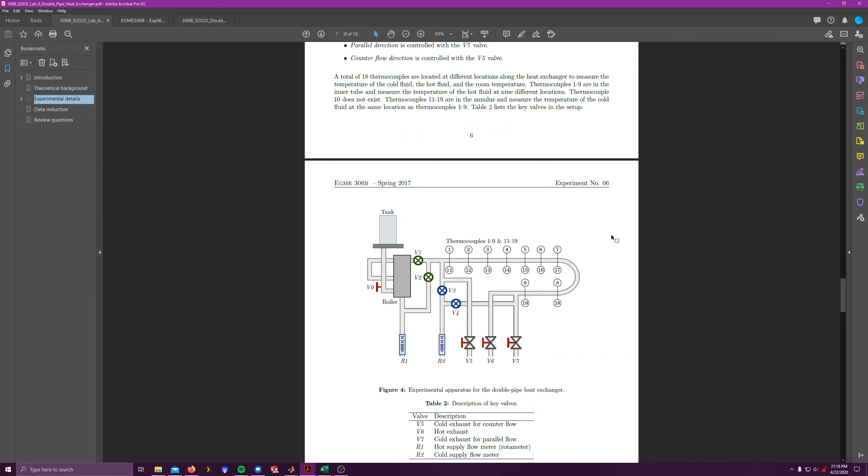And then here we have our setup, our test setup. So let me zoom in. So all of these circles here, they're the thermocouples that we have.

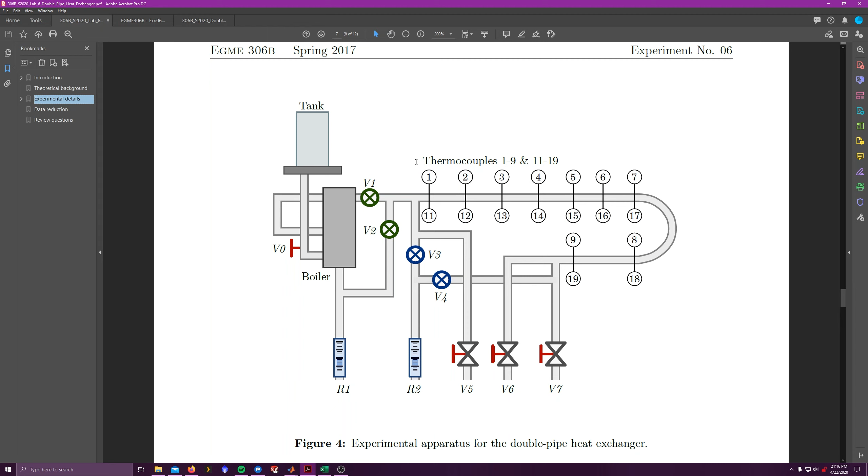Thermocouples 1 through 9 are going to be in the inner tube and they're going to measure the hot fluid. Let me make sure I remember that correctly. Yep. And then thermocouples 11 through 19 are going to measure the cold fluid, and they're going to be in the annulus. And as you can tell, all of these thermocouples are at the same axial location, so we can measure both of them at the same spot.

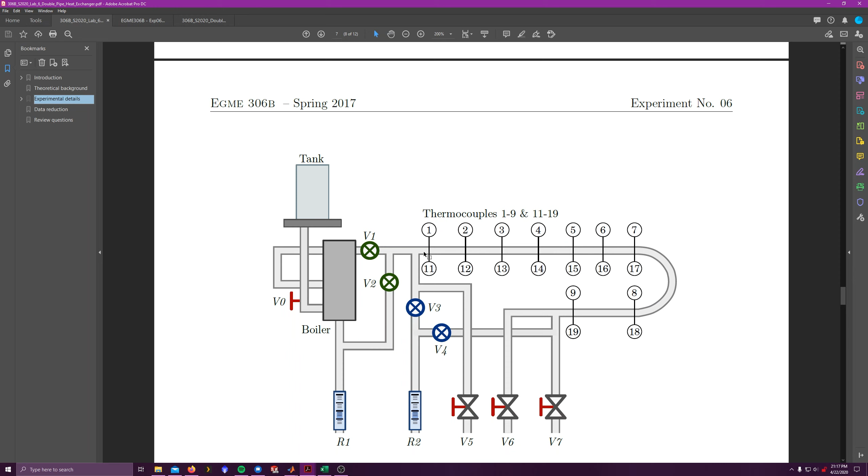Okay, and then in the lab, what we would have done, of course we can't do it, we would have two kinds of setups where we have uninsulated and then insulated for the heat exchanger. So basically, we would just have some gray foam, basically.

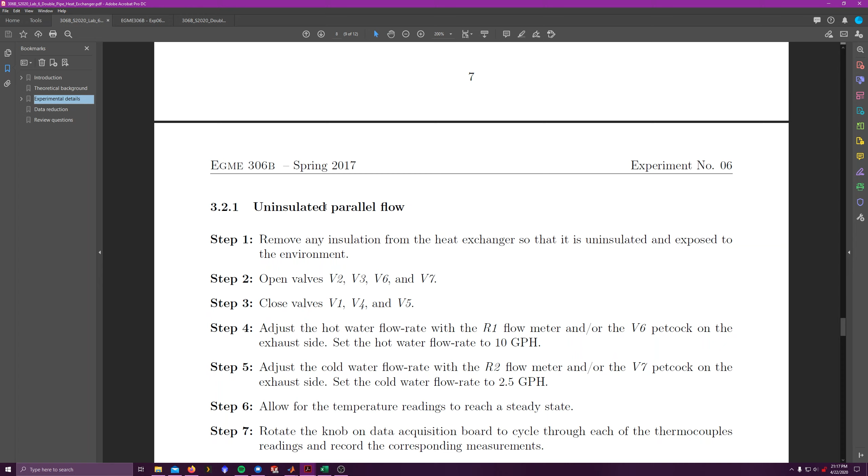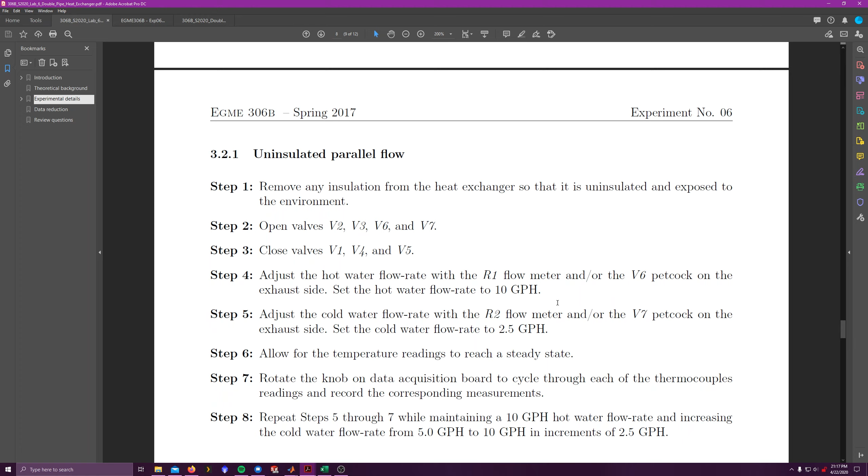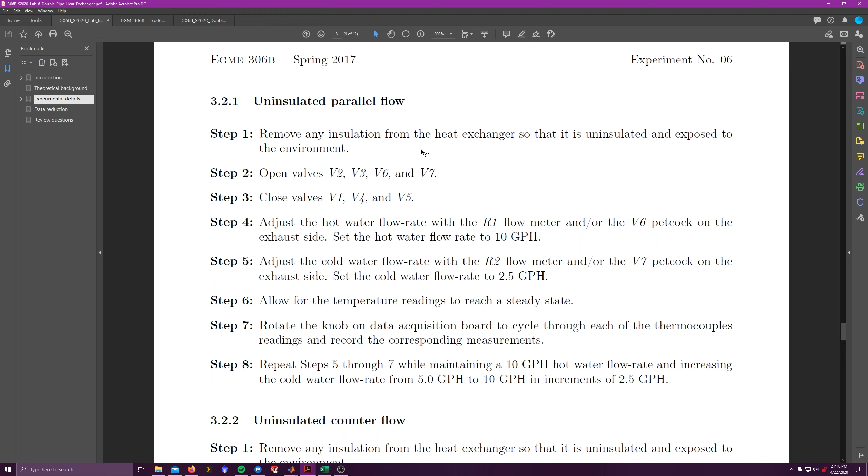Gray insulation. Okay, so what we do is we would start out with the uninsulated parallel flow. For the hot water, we would keep that at 10 gallons per hour, and then for the cold water we would start that at 2.5 gallons per hour, and then we would increase that up to 10 gallons per hour in increments of 2.5 gallons per hour.

Actually, 19, I think that's for the static port. Thermocouples 11 through 19, that's for the cold water. Okay, alright.

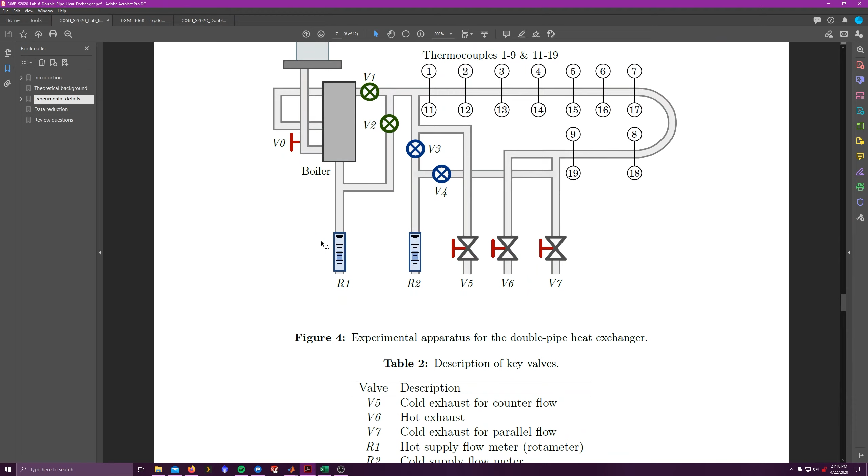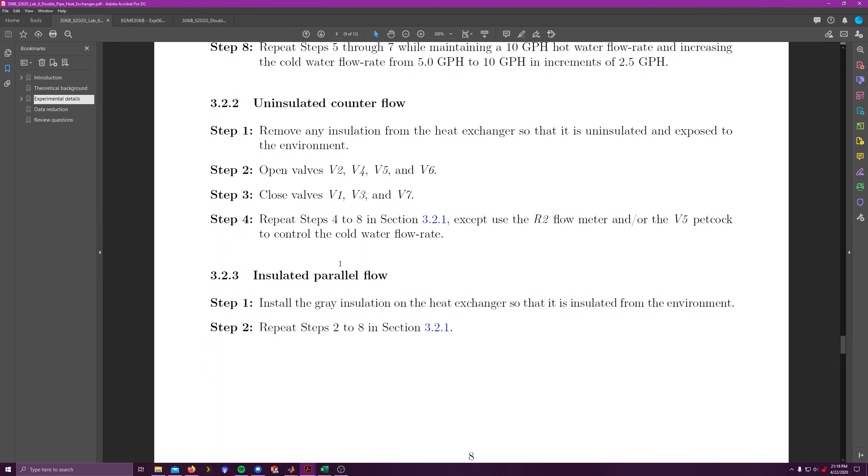So we're doing that, and then we have the insulated versions down here. Okay, so let's go back to the document here. So we have the uninsulated parallel flow, and then we have the uninsulated counterflow, and then we have insulated parallel flow, and then insulated counterflow. And we're basically doing the same thing each time where we're only going to adjust the cold water flow rate.

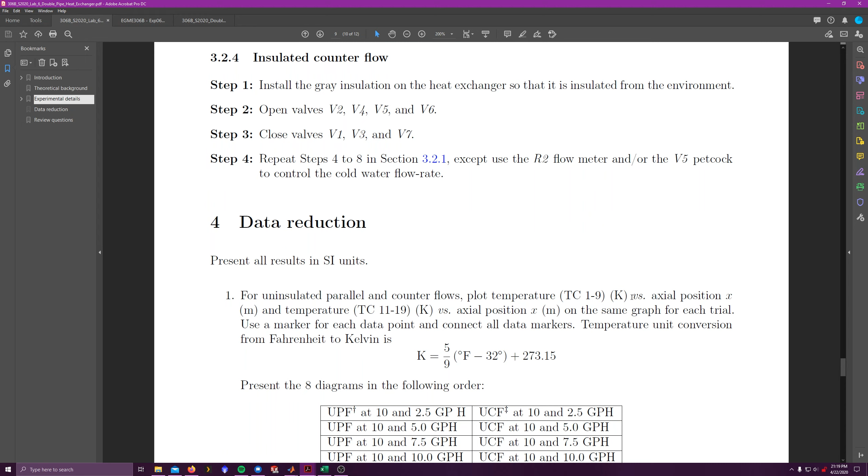Alright, so for the data reduction, what you have to do is measure or graph the temperature versus the axial position. And we're going to do that for all of the different flow rates, and we're going to do that for our insulated configuration and our uninsulated configuration.

And then for each of those graphs, you're going to have two curves on there. So you can have one curve for the cold fluid, and then one curve for the hot fluid.

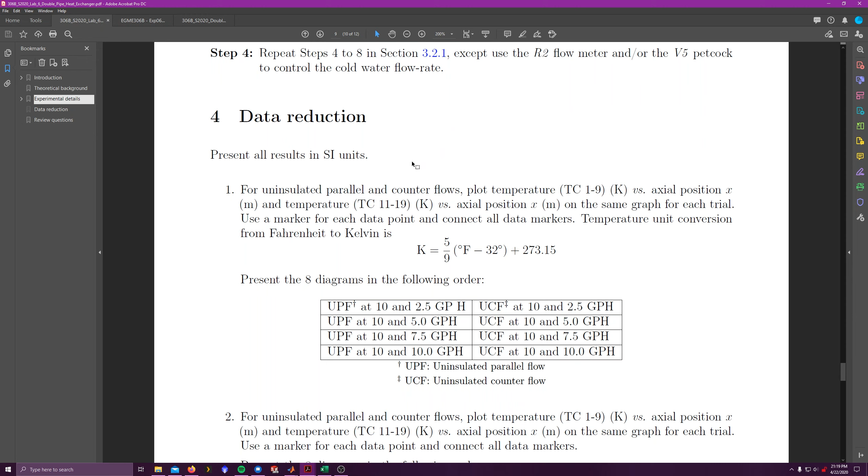Okay, so number 1 and number 2, they basically say the same thing. This one should just say insulated right here.

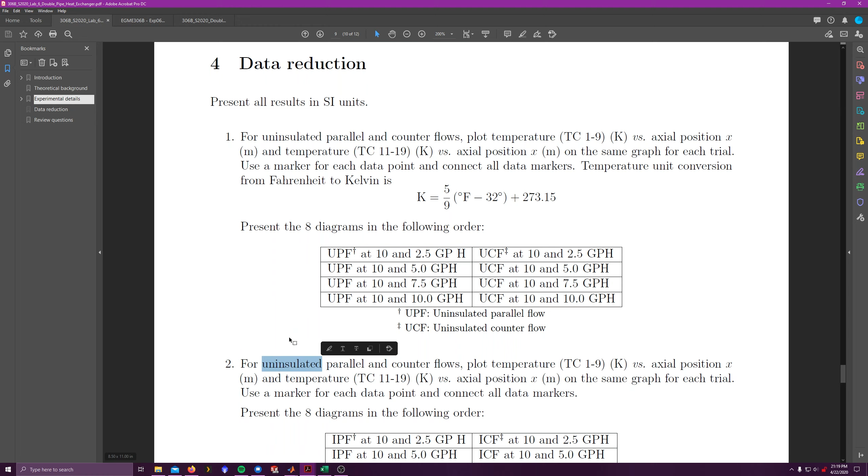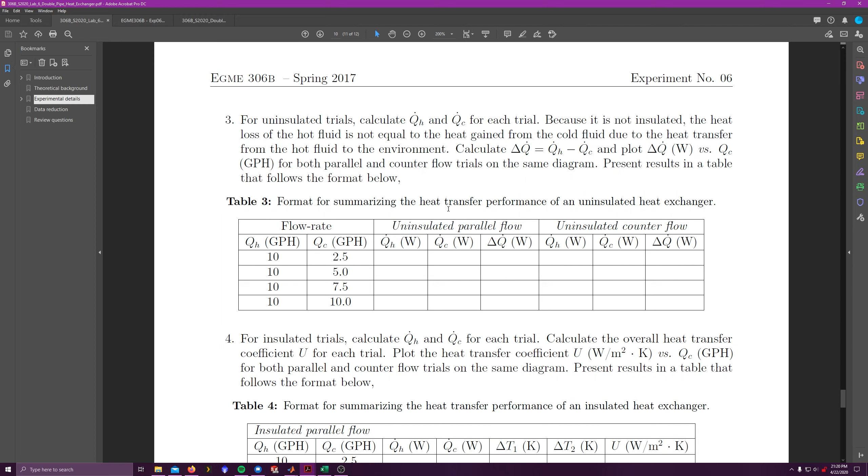Okay, so number 3, for the uninsulated trials, you want to calculate the heat loss, basically, and then we're going to plot that against the flow rate. Sorry, I'm looking at my notes here.

Okay, and then for the last one, we're going to calculate the heat transfer coefficient U, and then we're going to plot that against the flow rate as well. And that's the flow rate for the cold fluid.

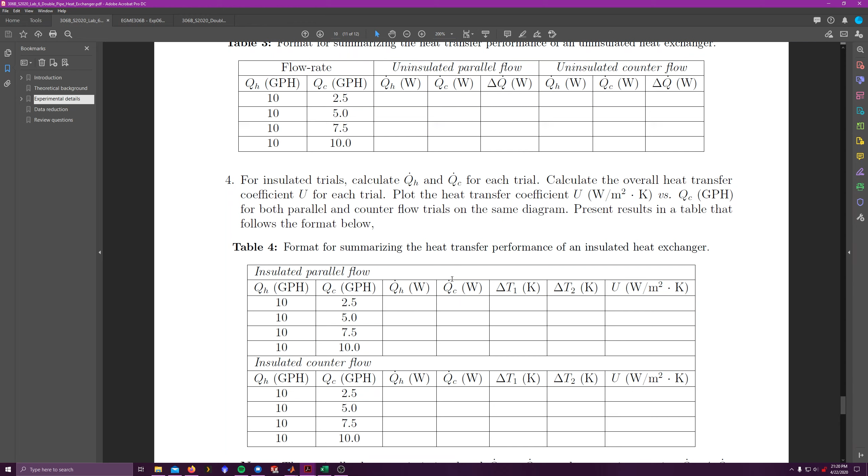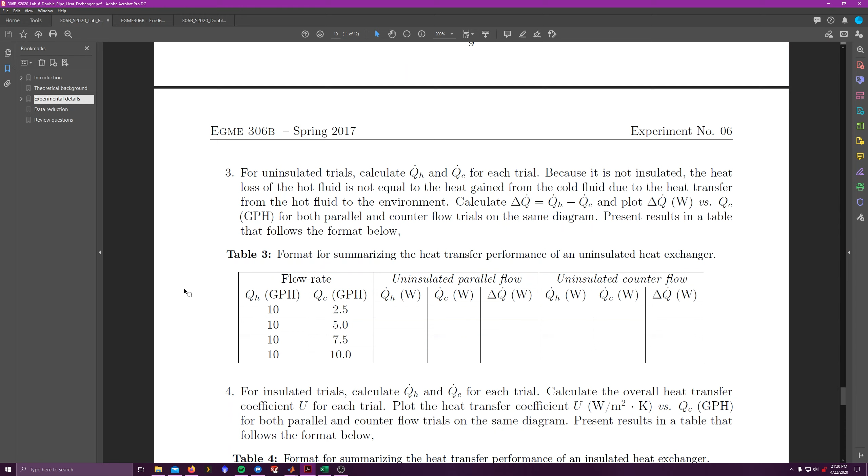Okay, and then for these last two graphs for number 3 and number 4, we're going to have two curves again, where one curve is for the parallel flow, and then one curve is for the counterflow.

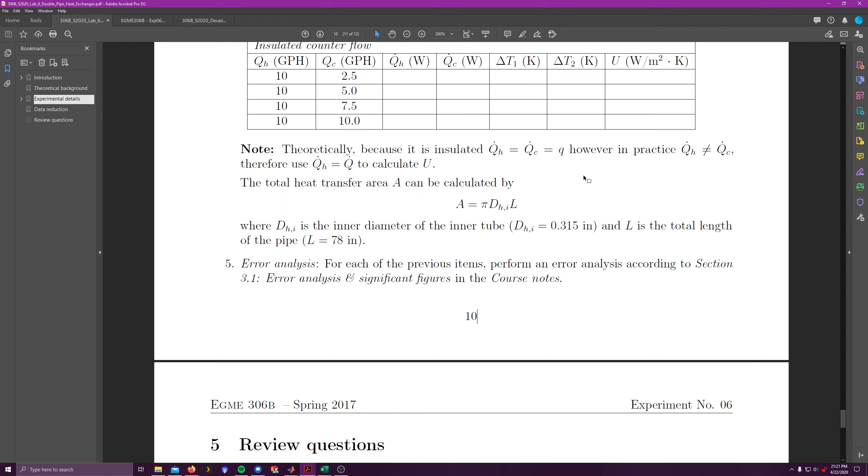And then, as always, this last part, this error analysis, is differential error analysis, or math-based basically. I still want qualitative error analysis too, so I want you to talk about some possible sources of error. I know that's harder to do now because you weren't actually doing the experiment in person, but you should still have some stuff. Alright, so with that, we're going to go ahead and get started on the lecture.

Recall that a heat exchanger is a device used to transfer heat between two fluids that are at different temperatures and separated by a solid wall. In our case, we have an inner tube at a hot temperature, and in the annulus we have a cold fluid. Those two different temperatures are two different water flows, separated by a solid wall. Our goal is to raise or lower the temperature of these fluid streams.

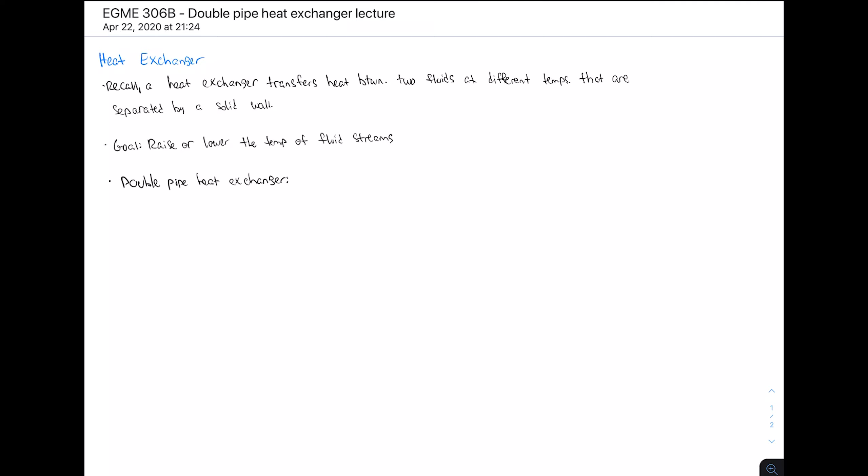Now we're going to talk about the geometry of the double pipe heat exchanger. It's composed of two concentric tubes, so I have tube 1 and tube 2. In the inner pipe we have hot fluid, and in the annulus we have cold fluid. In this case, it's going to be water.

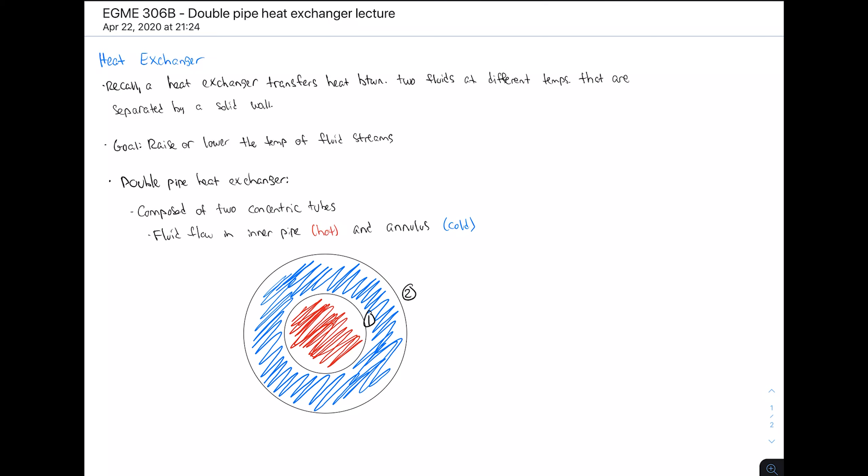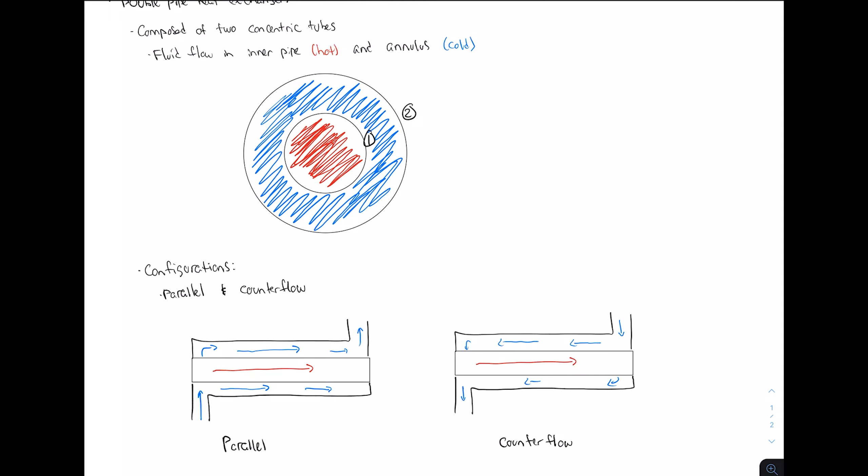For this experiment, we're going to have two different configurations: parallel flow and counterflow. As you can tell from my drawings, we have parallel flow on the left, where the flow for the hot fluid and the cold fluid are going in the same direction. On the right we have counterflow, where the fluid flow is going in the opposite direction.

In contrast to a cross-flow heat exchanger, the temperature of the fluid is going to be a function of the x location. We're going to see this right now when we compare the parallel flow and the counterflow.

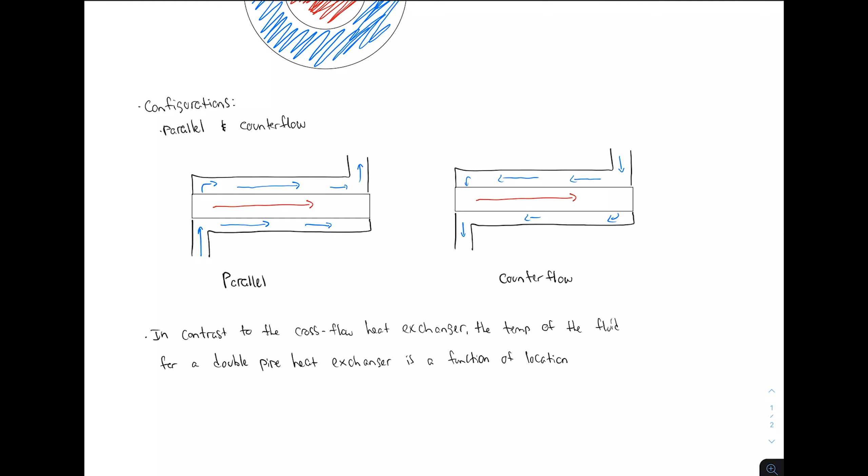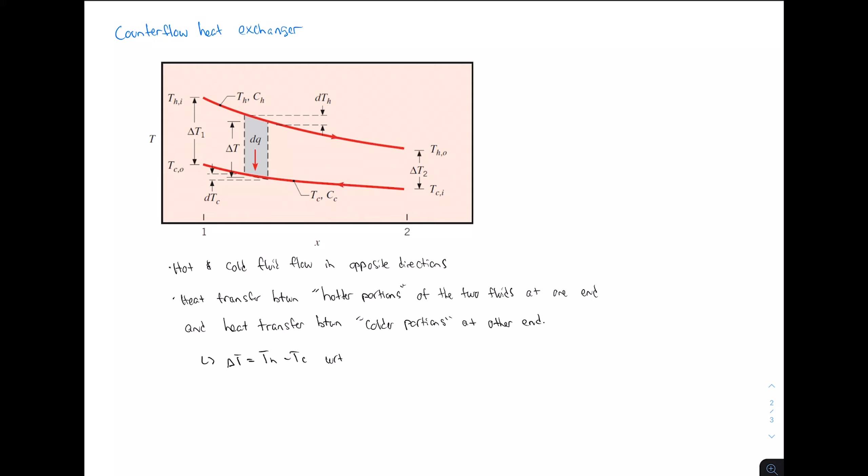Okay, so now we have the graph for the counterflow heat exchanger. So what we have here is the hot fluid and the cold fluid. They're going to flow in opposite directions, and they're also not going to enter at the same spot because of that. So in this case, the hot fluid is entering here, but the cold fluid is entering over here. And then we have the same kind of idea for the outlet for each of the fluids as well.

So if we look at this graph here, we see that the heat transfer between the hotter portions of the two fluids is going to be at one end, and the heat transfer between the colder portions of the fluids is at the other end. So for the hot end, that's over here on the left, and for the colder end, that's going to be over here on the right.

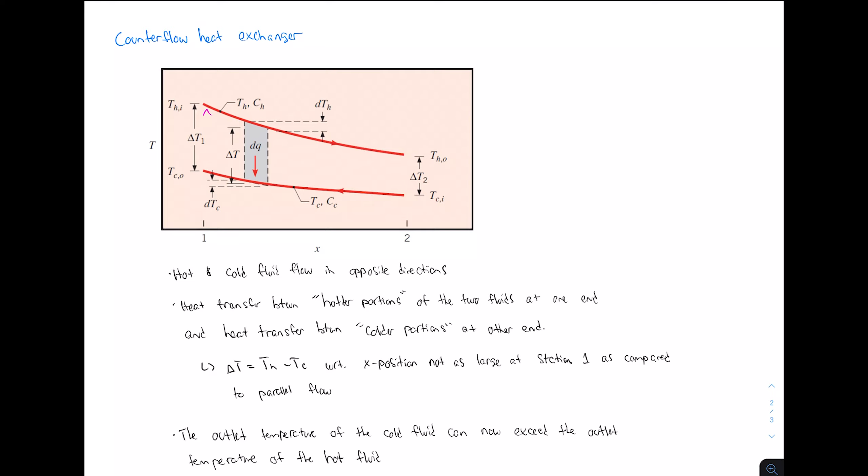And because of that, the difference in this temperature differential for the hot fluid and the cold fluid is not going to be as large at station 1 as compared to parallel flow. So if we look at this graph, we can see we have this temperature differential right there. And if we go back up to parallel flow, we see that differential is larger for parallel flow because we are starting at the inlet for both of those fluids, where we have a really hot fluid and a really cold fluid.

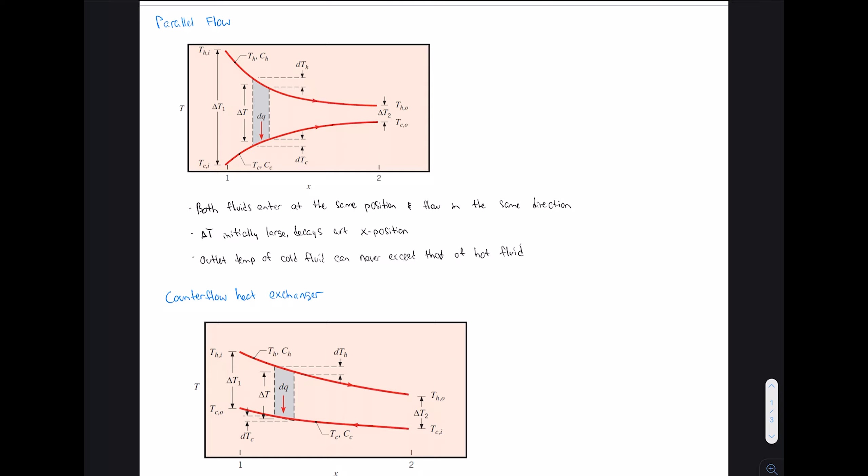But for counterflow, we have the inlet for the hot fluid, but at that same position it's the outlet for the cold fluid. So we're at a high temperature for the hot fluid at the inlet, but the cold fluid has been heating up throughout this flow because it's going in the opposite direction of the hot fluid. So it's heating up to the outlet, which is at the same axial position as the inlet for the hot fluid.

And then we have the same kind of idea for the outlet of the hot fluid and the inlet of the cold fluid. Because of this, the outlet temperature of the cold fluid is now allowed to exceed the outlet temperature of the hot fluid. So this cold fluid might continue to heat up, and it could theoretically heat up more than the outlet temperature for the hot fluid.

Okay, so now that we've got those theoretical ideas out of the way, we're going to begin the math portion of this, where we start to develop equations for the heat transfer in our system.

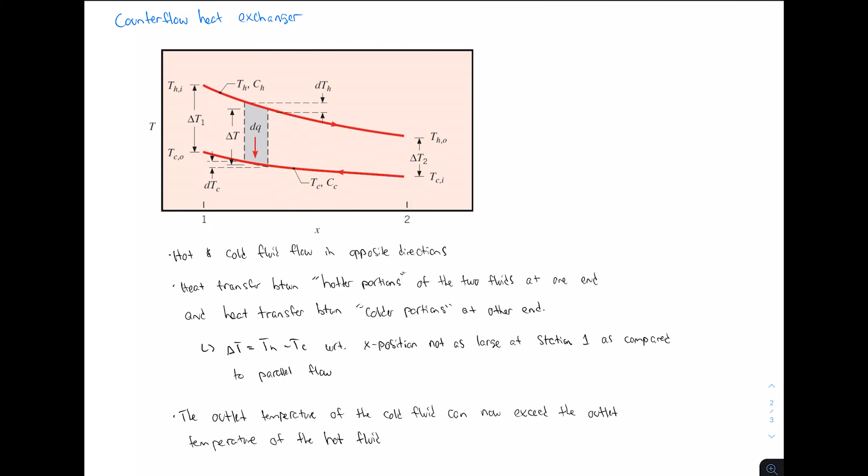Okay, so we're going to start this off by considering the case where we have axial variation of temperature in a tube with a uniform wall temperature, T sub W, with fluid flowing inside the pipe. So fluid enters at the inlet at x equals 0 with temperature T1, and exits at x equals L, the length of the pipe, at temperature T2. We'll assume we're heating the fluid, so the temperature of the wall is greater than the local temperature of the fluid.

So if we equate the heat transfer from the pipe wall to the fluid, we can write this equation: Q dot times pi times the diameter for a differential length element dx is equal to h, the convective heat transfer coefficient, times pi times the diameter, multiplied by the temperature of the wall minus the local temperature, times our differential length.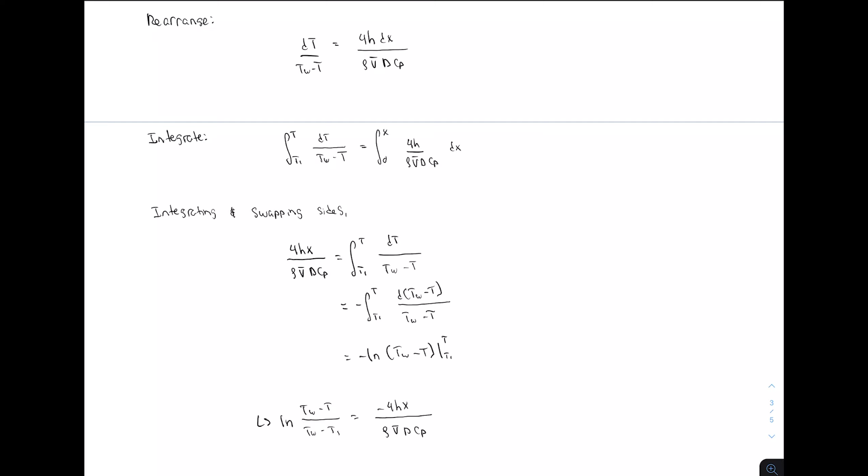Okay, so now what we're going to do is we're going to take the exponential for these equations so we can get rid of that natural log.

Okay, we took the exponent, and then I made a substitution for beta, so I can make it just a bit more simple.

And I've made a substitution within beta where I equated that to pi times the convective heat transfer coefficient multiplied by the diameter, and then divided by the mass flow rate for the water times the specific heat.

So for that, we already knew that the mass flow rate was equal to pi over 4 times the density times the velocity times the diameter squared. So I just made that substitution in there that we're going to use later on.

Okay, so this is fine. However, we're going to now make another substitution where we typically want to find this temperature distribution for the inlet at station 1 and the outlet at station 2.

Okay, so we're just going to plug in for that, and we're also going to utilize that substitution at the end there.

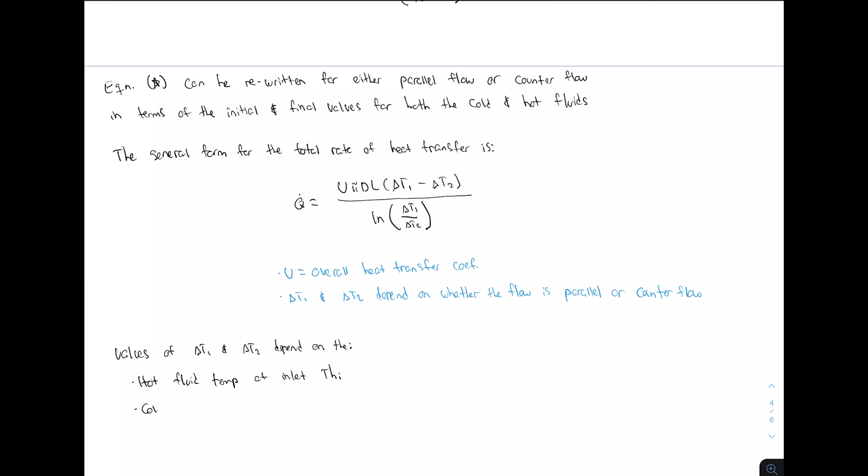Okay, so the values of delta T1 and delta T2 are going to depend on the hot fluid at the inlet, so that's THI, the cold fluid at the inlet, so TCI, the hot fluid at the outlet, THO, and the cold fluid at the outlet, TCO.

So we have, for parallel flow and for counterflow, delta T1 and delta T2. You're going to plug that into that equation right there. So for parallel flow, delta T1 equals THI minus TCI, and delta T2 is THO minus TCO. Let's go up, and we see that here.

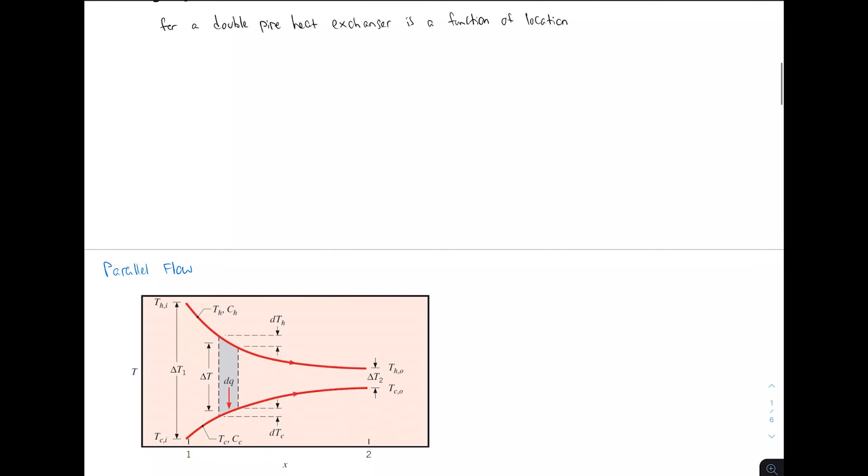So at the inlet we have THI and TCI, and out the outlet THO and TCO. So for parallel flow we stay consistent, where we have I, comma I, at the inlet, and then O and O at the outlet.

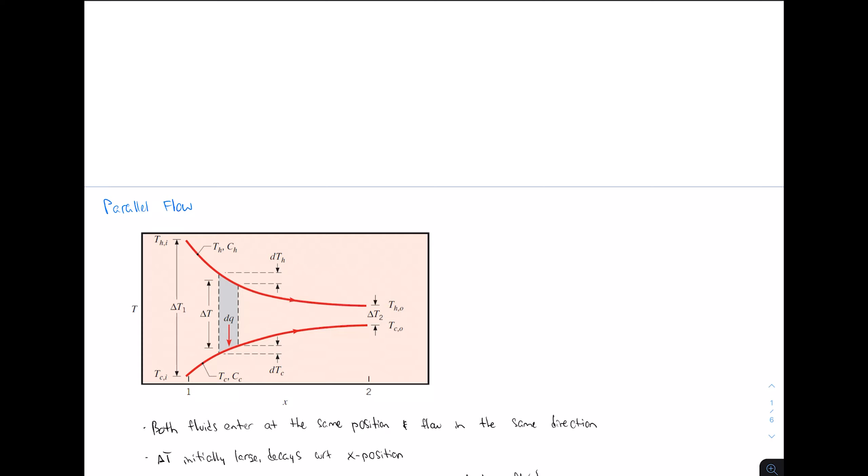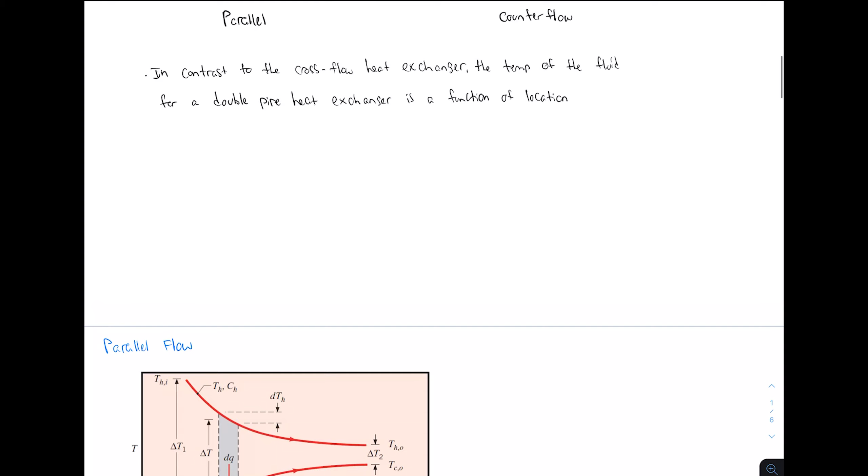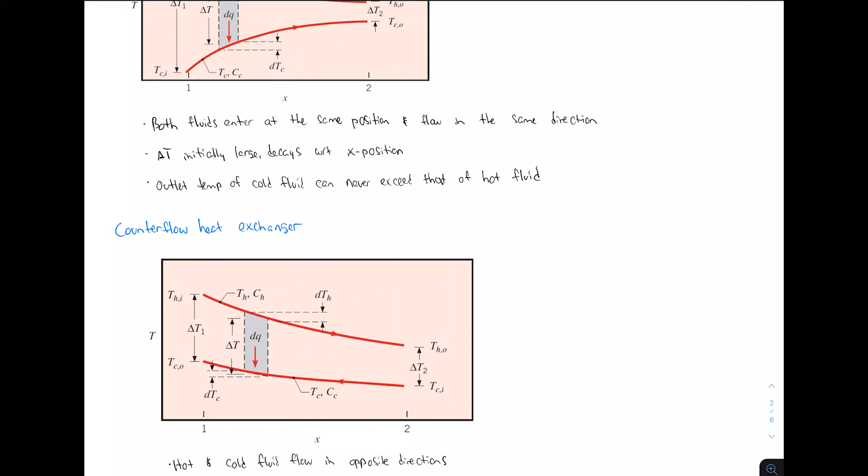Okay, let's go down. Then for counterflow, delta T1 is THI minus TCO, and delta T2 is THO minus TCI. So again these are flip-flopped because we're in counterflow. If we look at this, we have at the inlet, or station 1, THI and then TCO, and then at station 2, THO, the outlet for the hot temperature, and then TCI, the inlet for the cold fluid.

Okay, so now we're going to briefly talk about how to solve for the overall heat transfer coefficient, as that's one of the deliverables for the experiment.